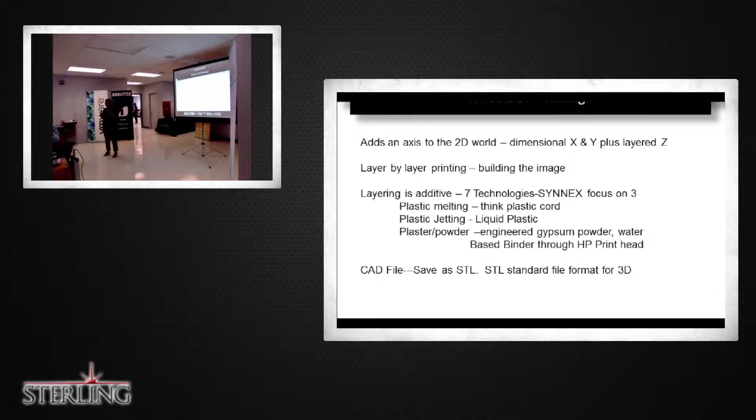3D printing basically adds a Z-axis, or an up and down, to what we're used to, the X and Y on paper. So the Z is the up and down axis. It's layer by layer printing, thus the term additive manufacturing. So we're adding layer upon layer to build our product or our part.

There's about 7 different printing technologies out in the market today. Fused deposition modeling is the most basic entry-level technology. We'll look at a few of those this afternoon, but again, today we're going to look this morning at FDM. SLA technology, stereolithography, has been out since 1986. It was actually developed by 3D Systems, so it is the oldest, the best form of 3D printing out there.

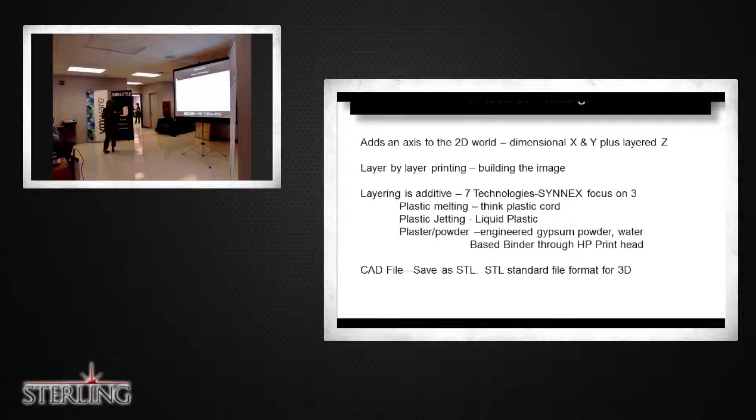Again, we're going to look at FDM, fused deposition modeling, fusing layer upon layer. So how do we print with a 3D printer? What we do is we take a CAD file, we design something in CAD, we save it as an STL. STL is the standard file format for 3D printing currently.

That file is then sent to your printer where it's basically sliced, and it prints layer upon layer of those slices, adding layer upon layer.

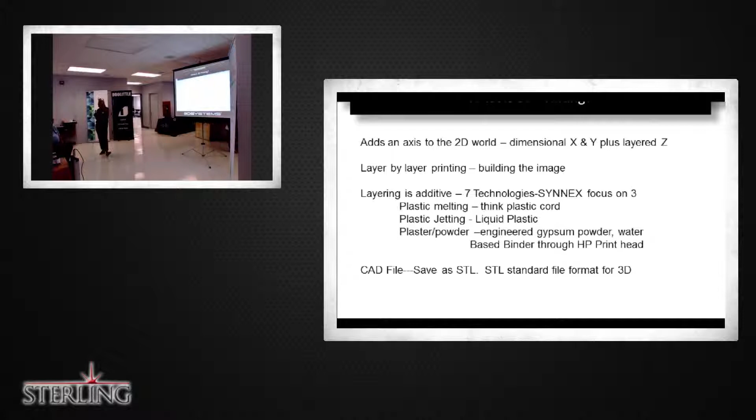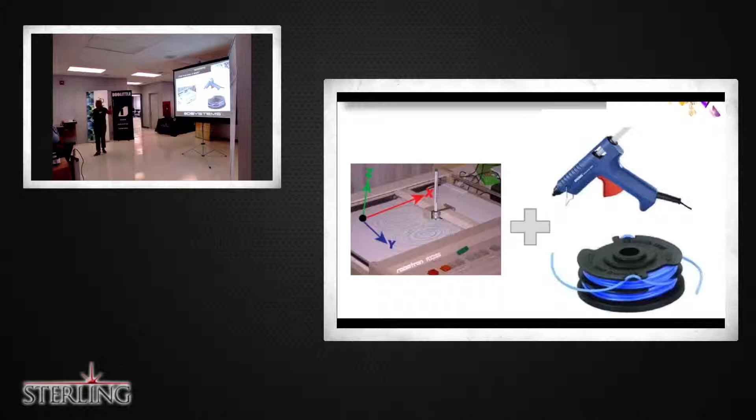So FDM, again, fused deposition modeling, how does it work? It's adding the Z-axis to the X and Y. How does it do it? It's basically a glorified hot glue gun. It takes a spool of plastic, pushes it through a heated print tip, drops it to the platform, and keeps outlining the part over and over again until it builds it.

I do call it a glorified hot glue gun. That's the easiest way to think about it. That's exactly the technology. Nothing more than that.

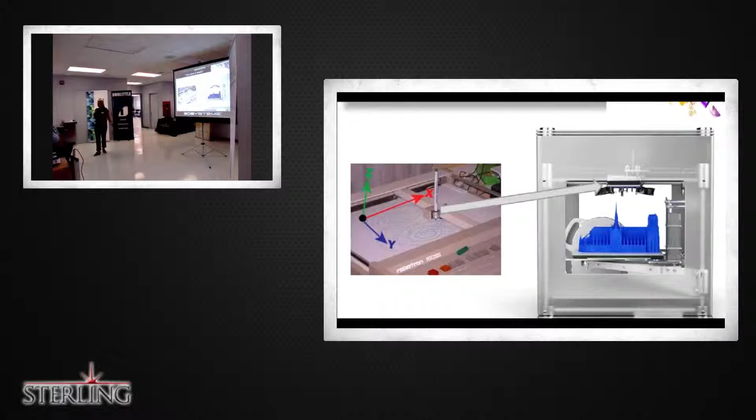What is available from 3D Systems and what's out in the marketplace, I'll just give you a little bit of both. This is entry level. This is the small desktop version. This is the unit that you're selling off the shelf at Staples. It's about a $900 piece of machinery. It'll print you a 6x6x6 part with 2 different colors printing.

The cartridges snap into the side. You can see them, they're proprietary. They're chipped like a wide format inkjet cartridge or your printer at home. And it reads how much is left on that spool.

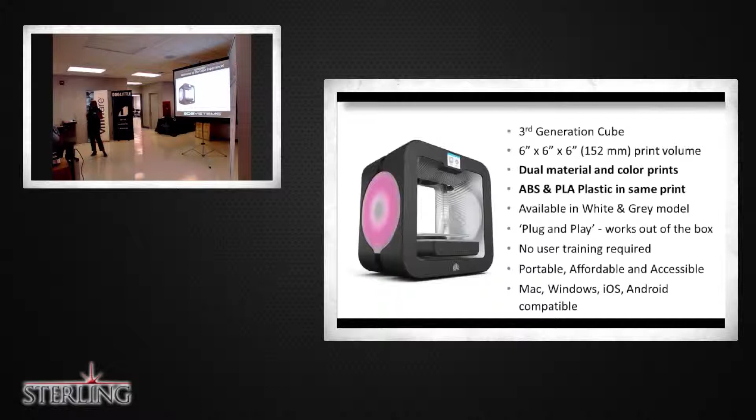Again, you can print up to 23 colors. You can print in both ABS and PLA. PLA is just a green cornstarch-based plastic. So for those that have the necessity of printing green, that would be the PLA. It is also Wi-Fi, you can print it from your iPhone as well.

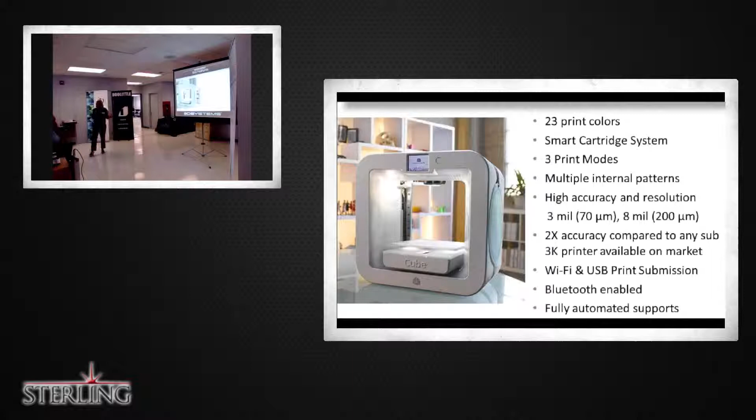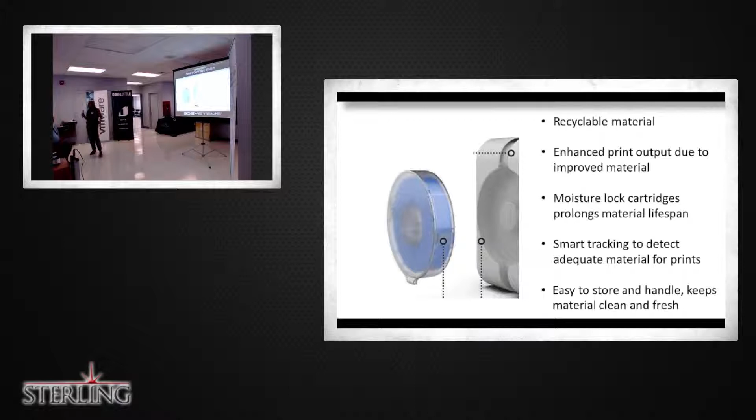Again, these are the smart cartridge system. You'll see some open source or open spools on a lot of the stuff that you're looking at on the internet. This is what sets the 3D line a little bit apart. It's actually enclosed, so your plastic's not spilling all over or spewing out. It's a controlled environment.

What was the price before on the old version? Older FDM printers, like from the competition? Well, yeah, generally the FDM technology ranged anywhere from about $2,000 to $10,000 about 5 years ago. It's now down to $800 to $5,000. So the technology is coming down, price points are coming down, ease of use is making these units very popular.

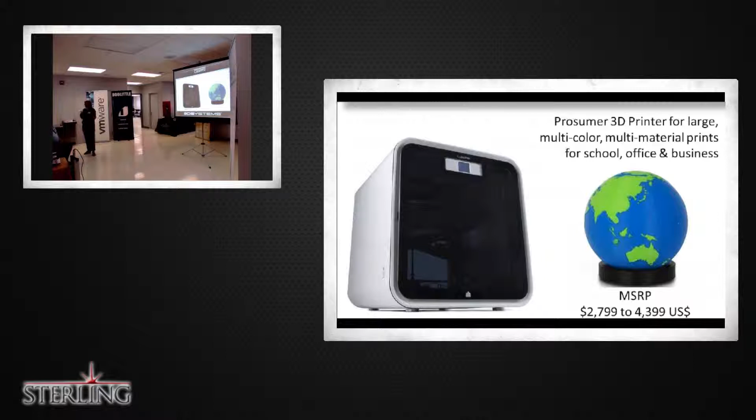That's why we're starting to hear so much about it. And they're also starting to use different types of materials that we can all relate to. Things like plastic, PLA, chocolate, sugars, stuff that we're used to hearing about and we can now relate to as well.

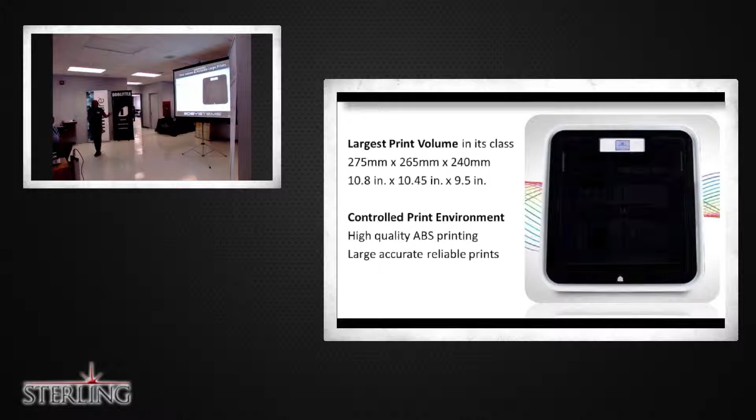3 different versions of this: single color, 2 color, all the way up to 3 color printing, about the size of a basketball as well. You can see this unit printing in here.

The new Cube Pro, though, will give you the ability to print in multiple materials. So not only plastic, you'll also be able to print in nylon and polyester. So now you're getting the old school fused deposition modeling printers that used to cost you $25,000. You can now get into for about $4,500.

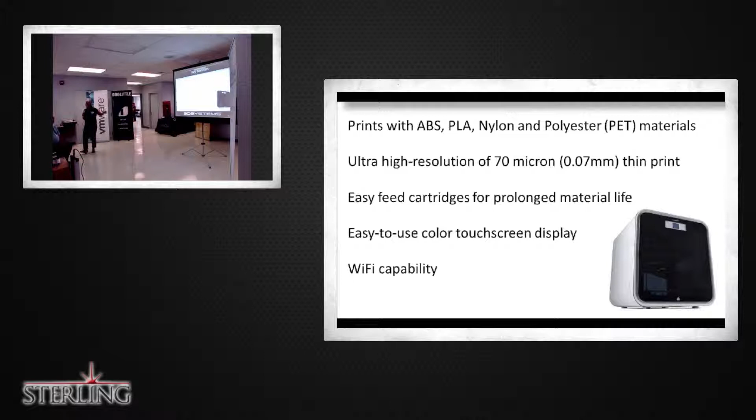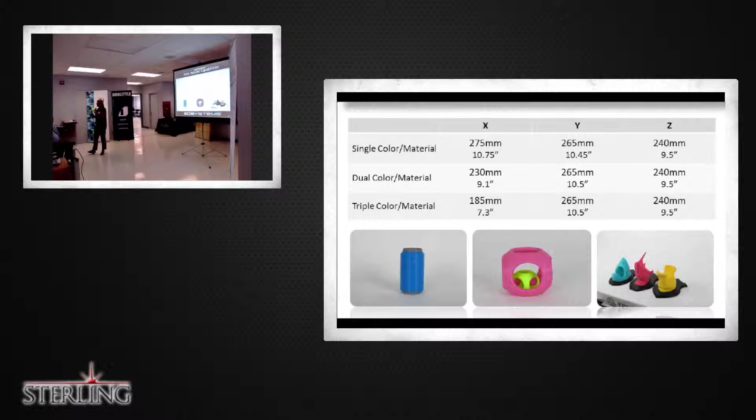This printer is going to print in 70 microns. What Robert's printing over there is about 125 to 150 microns, that's how thick the plastic is being melted out of the print tip. We're down to 70 microns here, so now you're able to print microfine details on FDM technology. That's what sets this printer apart.

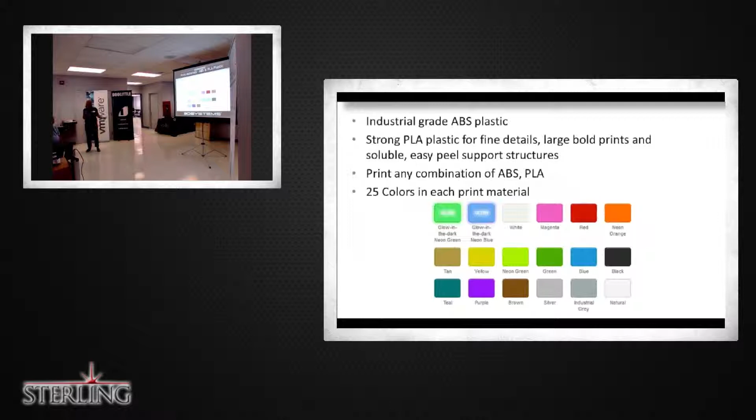Again, 3 colors, you can see them layered. There's no color mixing, of course, because you're just melting plastic. Multiple materials come out with a different color every day - fluorescence, sparkles, glow in the dark, very important colors.

The new technology is going to allow you to do multiple materials. Nylon will actually let you get into printing prototypes for businesses. So this lower-end printer is going to progress into that marketplace as well. If you have kids that want to create glow-in-the-dark parts for their Honda, they could do that.

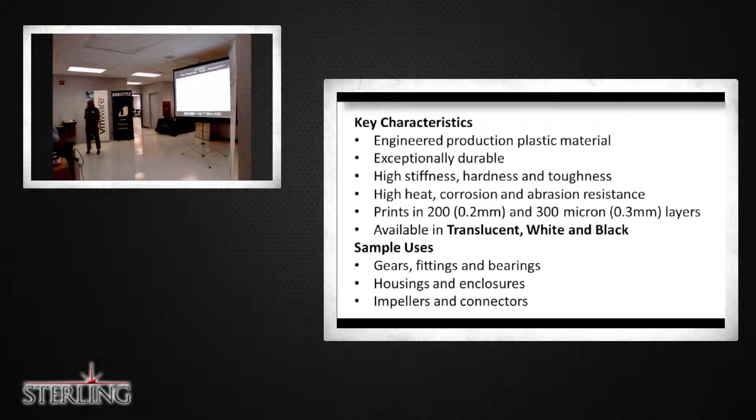Put it on their car and drive at night. Polyester materials as well, so we're all familiar with that. Now we've got professional printability with these multiple materials available. So you're starting to see your low-end printers able to print multiple materials, getting you into multiple markets for under $5,000.

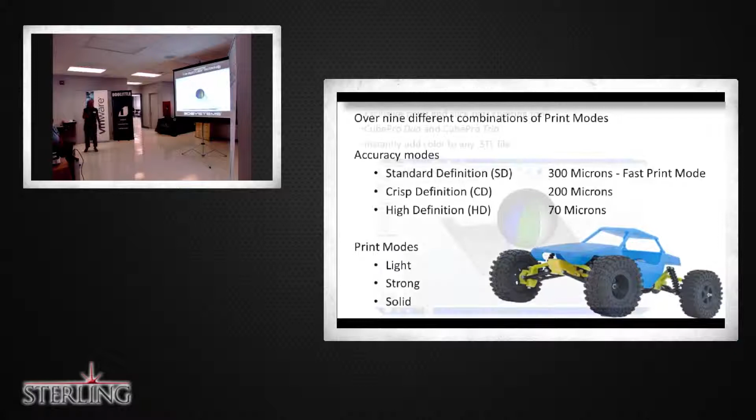All of the Cube and 3D systems come with their own software. It gives you a copy of Cubify Invent, which allows you to create a product. It's almost like a free program on the internet called Tinkercad. If you're not familiar with that and want to start learning how to 3D model, that's a great place to start. It's called Tinkercad.

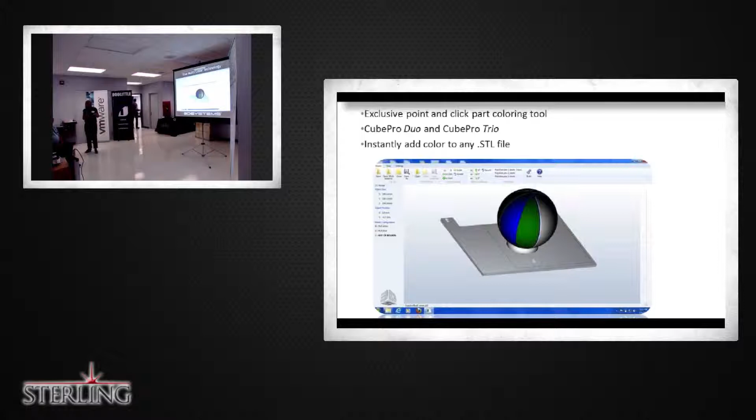Cubify Invent does the same thing, same technology, drag and drop to create and invent, as well as your Cube software, which basically slices the file. You're able to print in color, so you can colorize your part at that point of creation.

3 different models again - we talk about number of print heads, that's up to 3 colors, multiple materials, peel away support. I'll go over that a bit with you because as we progress this afternoon, you'll hear a lot about support systems.

So what we talk about in 3D printing is when you start to print a project or a part - imagine printing a giraffe for ease of imagination. When you get up to its chin, you cannot print its chin suspended in air, so it builds itself a support system or a little shelf to print that chin on. That support system then needs to be removed.

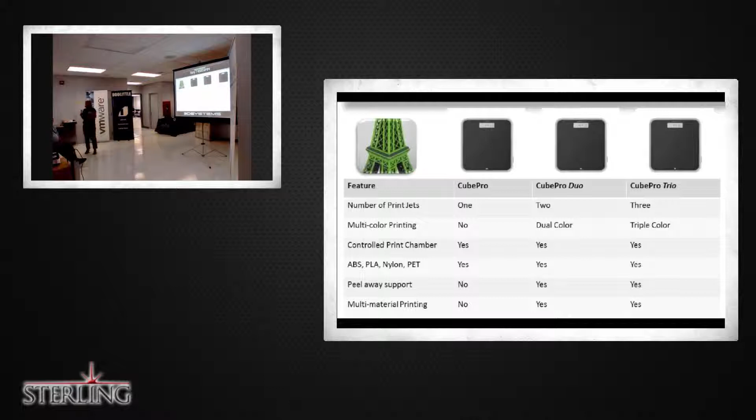Every 3D printer in the marketplace uses some sort of support system. Post-processing, or removing that support, is what they talk about when they mention the post-processing part of it. So that's always a good thing to ask somebody when you're talking about 3D printing - what type of support system it uses, because that's going to tell you how much manual work goes into the process.

Again, STL files are the standard file format. Our products also come with, this is my sales pitch, free software, Wi-Fi capable, Mac and PC as well. Target market for this is the same as the Cube - it's still FDM technology, but the multiple material capability should get us into slightly different marketplaces. It's a great entry-level point for anybody considering 3D printing.

Another good thing to start looking at are 3D scanners. 3D scanners now come out from anywhere. The Sense scanner is $400 MSRP, so that gives us the ability to scan an object. The scan is then an STL file that we send directly to the printer. So we can actually teach kids the whole entire process for under $2,500 if we go single color - we scan it, send it as an STL, and print it out.

The Capture is a higher end scanner, still middle of the road. You can get scanners anywhere from $400 to $50,000. The Capture scanner comes in around $20-25 thousand, so it's middle of the road scanning - still great for the X60 units you see in here, as well as some higher end, but it's truly not top of the line. The $400 scanner is a great way to get into that marketplace as well.

All right, now that's basic FDM technology. Any questions?